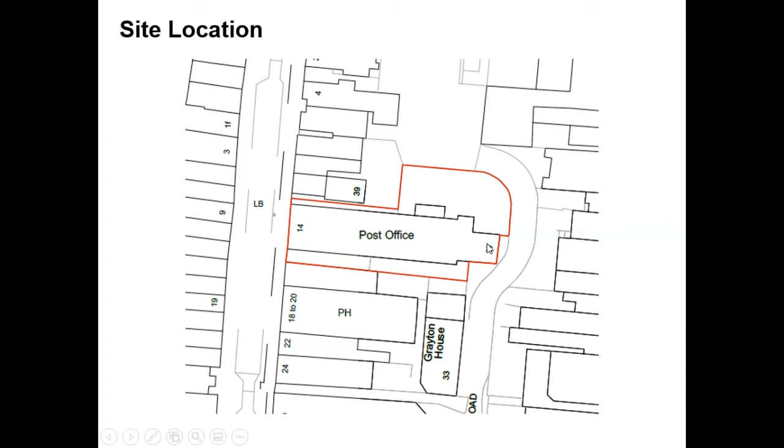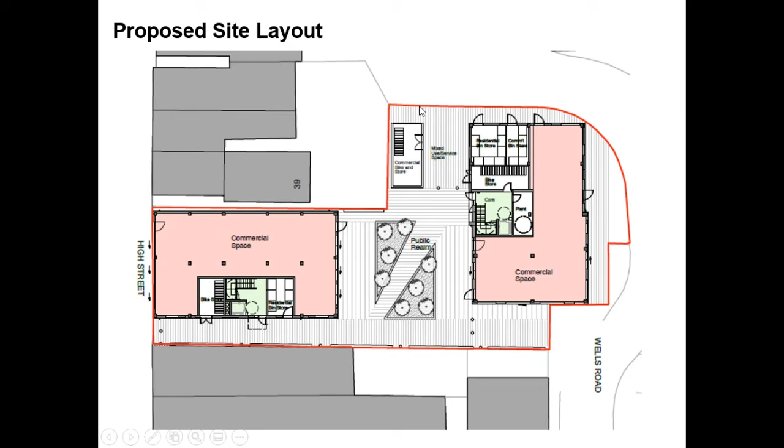In terms of privacy, the council's Quality Places SPD requires a distance of 20 metres between new build flats and 22 metres between new and existing. The new blocks would fall below this standard, with 16.2 metres between them.

There is an amenity issue referenced in the report, relating to the conflict between the windows on the first and second floor level on the northern side of the front building, and those present within the adjacent Flat 12A High Street. A solution has been proposed to address this and prevent a loss of privacy, which I'll cover later in the update section of the presentation.

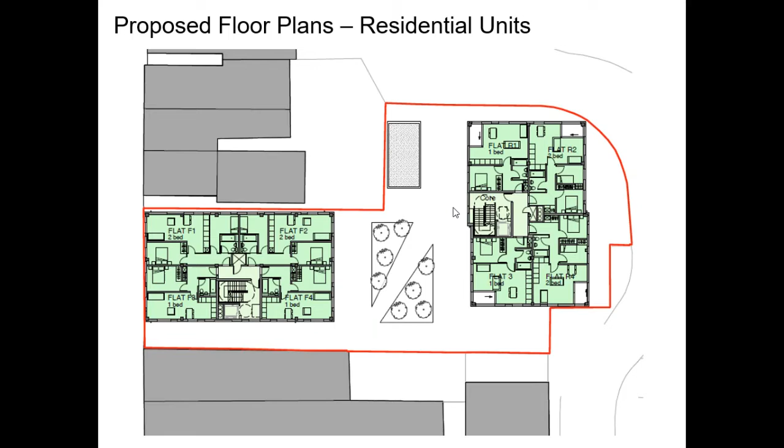It's been designed so the third floor is recessed from the building's main elevations, to visually reduce its perceived height and massing, and thereby respect the predominantly 2 and 3 storey scale of this part of the street.

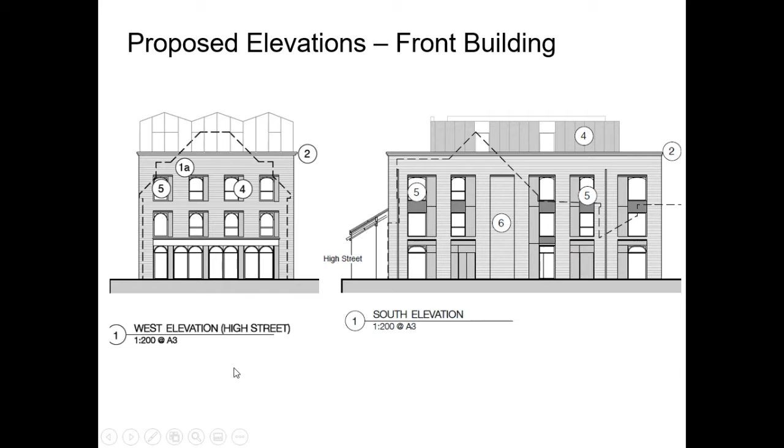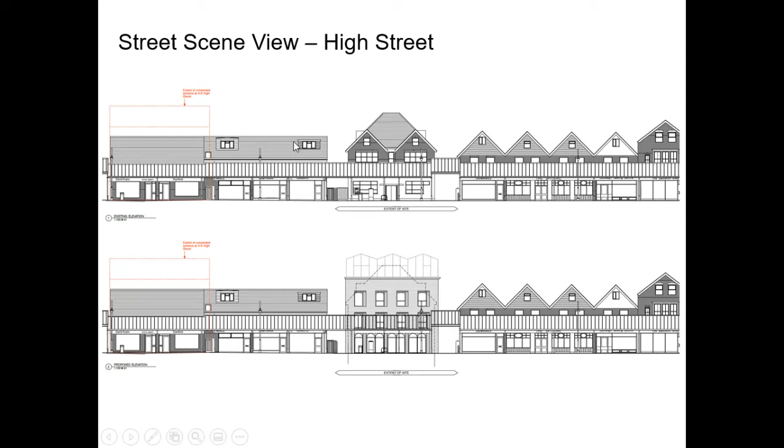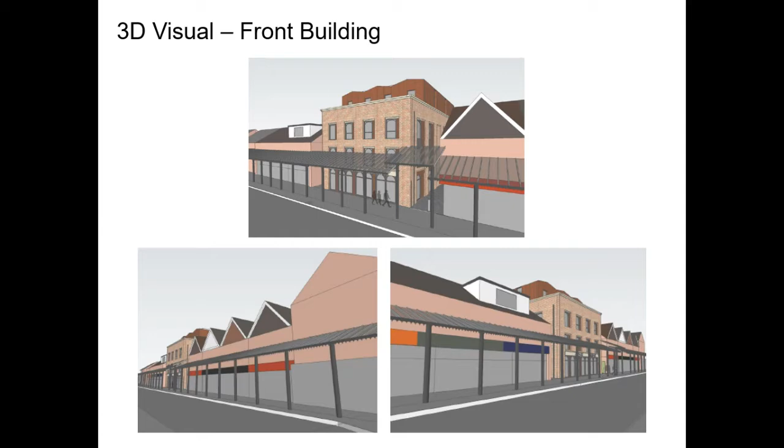Design features including the use of perforated elevational panels to the side of the windows incorporate a franking pattern, included to provide a subtle nod to the former use of the site as a post office. Overall, the simple and robust materials proposed give a high quality appearance to the development, while also providing visual interest to the High Street.

Turning to the rear block, which is the larger of the 2 buildings at 6 storeys in height. This building has less formal elevational symmetry to it, but the overall design remains well ordered and structured to provide continuity with the front block.

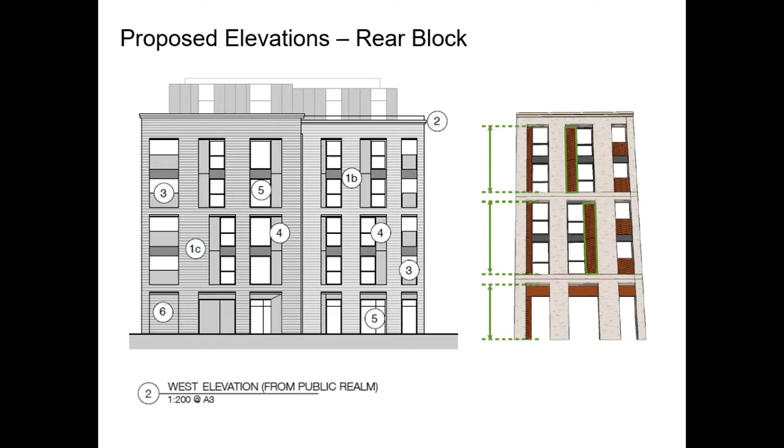Again, a simple palette of materials was used, but this time with buff coloured bricks to reflect the more varied materials on Wells Road, where the development will sit.

Whilst acknowledging that a building of this scale and location will begin to alter the character of this part of the centre of Eastleigh to a degree, it's not considered that it will detract from it, but rather act as a positive driver to encourage further redevelopment and regeneration of this part of the town. The approach to design has been supported by the Council's urban designer, as well as the independent Eastleigh and Winchester Design Review panel.

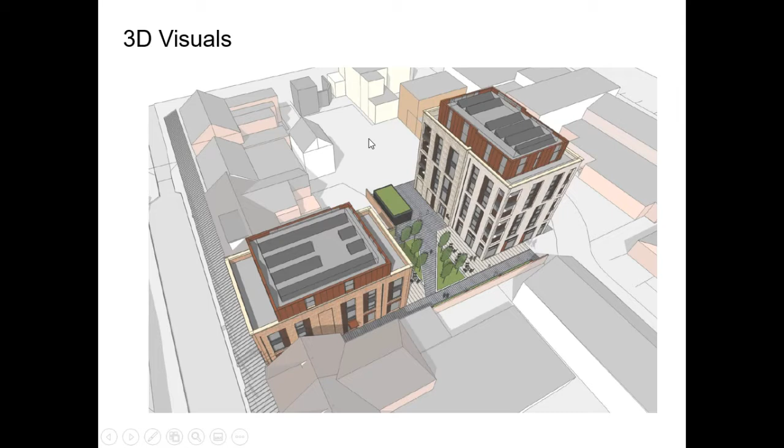As you can see, the space will be well landscaped with varied hard surfacing and soft planting. It also provides potential for outdoor seating for the new commercial uses. As shown in the images, it's well overlooked by the new buildings, which is positive from a community safety perspective, and outdoor lighting will also be provided, which will further assist with this.

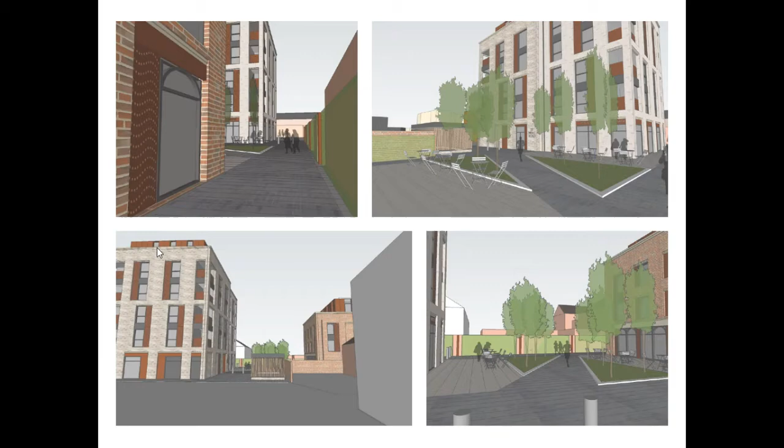The image to the bottom left shows the views towards the site looking southwards, and this, as well as the image in the top right corner of the screen, helps demonstrate the effectiveness of the vertical pairing of the windows mentioned previously, splitting the building into 3 and reducing its perceived massing and scale. They also show the more limited views afforded to the very upper storey of the rear block from street level, with its recessed nature notably assisting in this respect.

Some updates to the reports as set out in the agenda. Some further consultation responses have been received. Southampton Airport have confirmed they have no objection, and have recommended an informative in relation to the use of cranes.

Environmental Health have also raised no objection subject to a range of conditions. These cover contaminated land, hours of deliveries, hours of operation for commercial uses, and noise control measures covering building insulation and music levels within the commercial units, all in the interest of amenity. Members have been sent around today an updated list of these conditions.

Responses have also been received from Economic Development, who advised they're supportive of the principle of redevelopment that contributes to the regeneration of Eastleigh Town Centre, and that it improves public links between High Street and Market Street and the surrounding public realm.

The matter of the reduction in employment floor space, mentioned earlier, was raised, and a developer contribution has been requested to mitigate for this, which the applicant has agreed to. Other matters concerned landscaping provision and the need to ensure new commercial uses can be retained moving forward, which are already covered by conditions set out within the agenda.

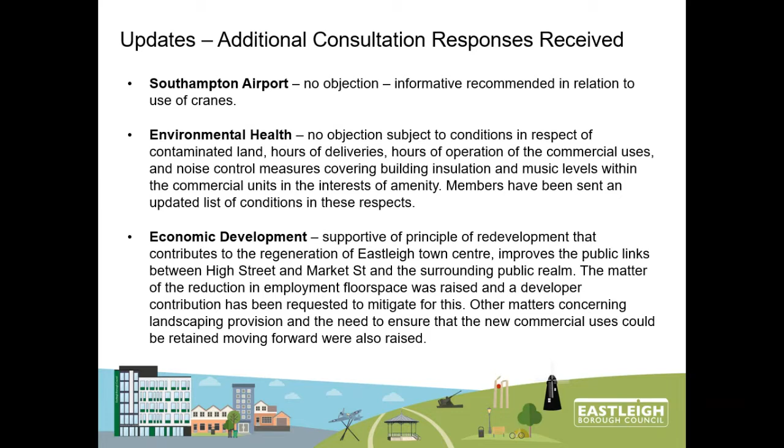Further updates: amended plans have been received. I mentioned in the earlier slides that there was a bit of an issue in terms of the relationship with the windows on the northern side of the building and number 12A High Street, which lies to the north.

To address this, the applicant has reduced the number of windows on this side, so there are now brick panels included, and they're also proposing the use of externally fitted louvres to those windows that remain immediately alongside the neighbouring property. You can see these denoted by the horizontal lines here.

On the right hand side of the screen there's a section drawing which shows how they'll work. They're fitted at an angle to the exterior of the windows, and they prevent views down and into the neighbouring windows and roof lights, which you can see denoted here.

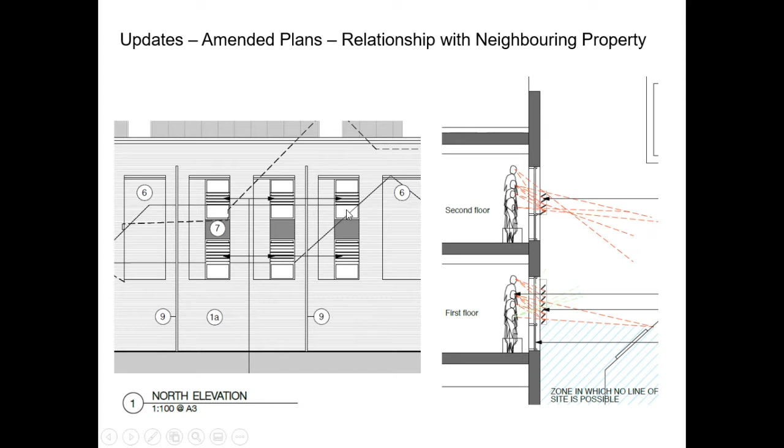Just for clarity, the lower section of these windows will be obscured to prevent views out of it, and conditions are recommended in these respects.

So in summary and conclusion, the development accords with local and national planning policies in terms of making efficient use of a sustainably located and partly vacant brownfield site and achieving appropriate densities, whilst at the same time respecting the character of the area, promoting regeneration and change within Eastleigh Town Centre and contributing to its vitality and viability, as well as securing well-designed and attractive places.

It will also include an over-provision of on-site affordable housing and mitigate its impacts upon, and contribute to improvements to, local infrastructure through developer contributions, which are both social and economic benefits of the scheme. It's also acceptable in terms of other material impacts, including highways and residential amenity, with no objections having been raised by consultees, subject to conditions and/or planning obligations.

The updated recommendation is therefore subject to the completion of outstanding consultations, of which there are a few remaining. These relate principally to drainage matters, and also whether or not any contributions will be required for education and health, and then the addition of any necessary amendments or conditions.

The applicant enters into a legal agreement to secure the required affordable housing and planning obligations, and the completion of a habitats regulations assessment of the development by the local planning authority, and the undertaking of subsequent consultation with Natural England where required, to delegate back to the Head of Housing and Development in conjunction with the Chair and Vice Chair of Eastleigh Local Area Committee to permit. Thank you, Chair.

Thank you, David. So we're now going to go to members of the public who have registered that they want to express an opinion on this item. I believe we have 2 written statements from members of the public who wish to register their objection. Can I ask Guy Riddock, please, to read the statement from Mr. Rod Murchie?

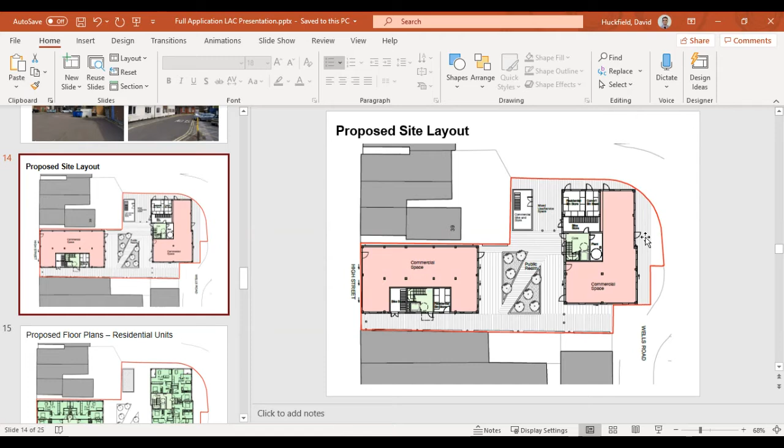In terms of the greenery space, let me go to... let me see if I can find the visual. So in terms of the elevation you were talking about, is it this side of the building in here, or the main pedestrian walkway that would take you from High Street down through past the development to Wells Road?

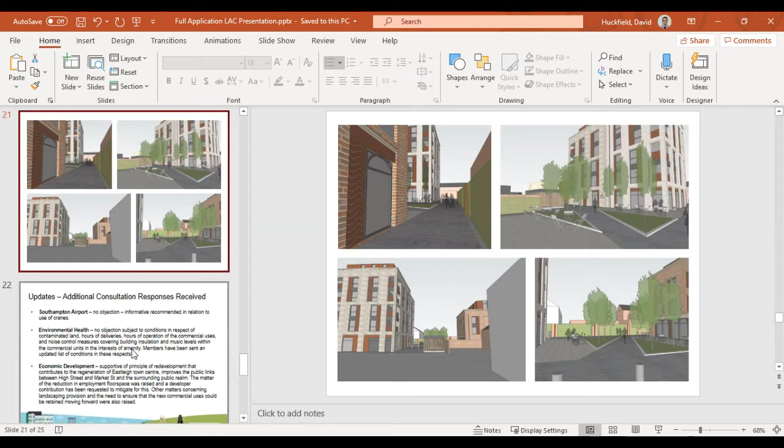So that picture you're pointing at now, the right hand side of that, is to be planted all the way down, is that correct? I will double check. If you can leave that with me, I'll come back to you on that. I'll just double check within the documents and come back to you on it.

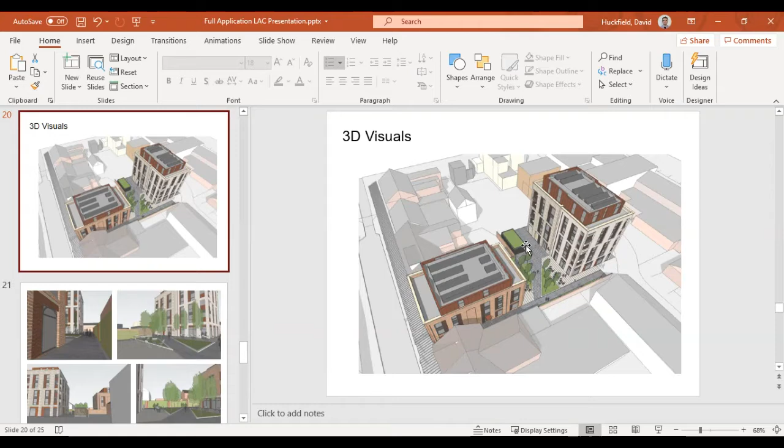Additionally, there is a green roof which is also proposed as part of the mitigation measure, and additional landscaping which will go on the ancillary storage buildings - that's the bike storage and bin storage building in the northern part of the site. So I'll just double check whether that's still proposed. It's indicated by the visual along there, but I'll double check on that point and come back to you if I may. Okay, thank you.

So do we have any other questions from councillors?

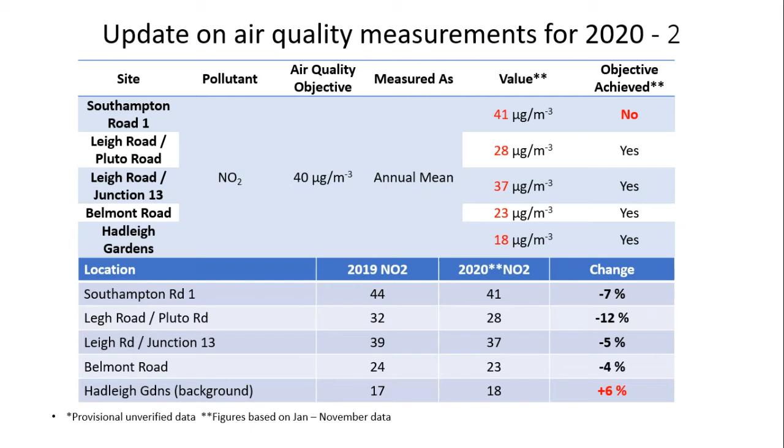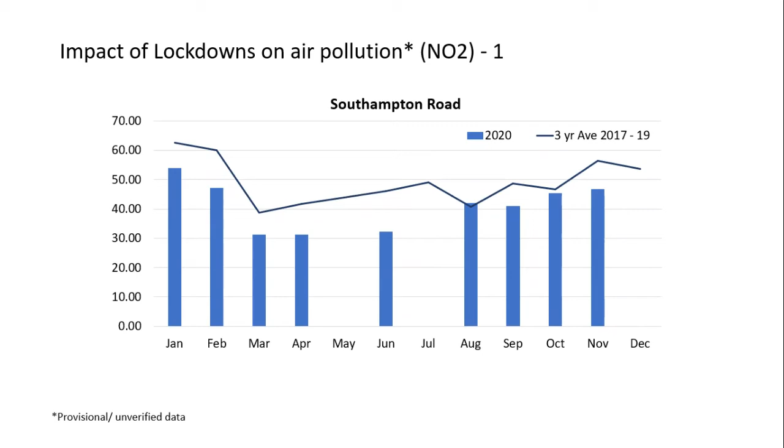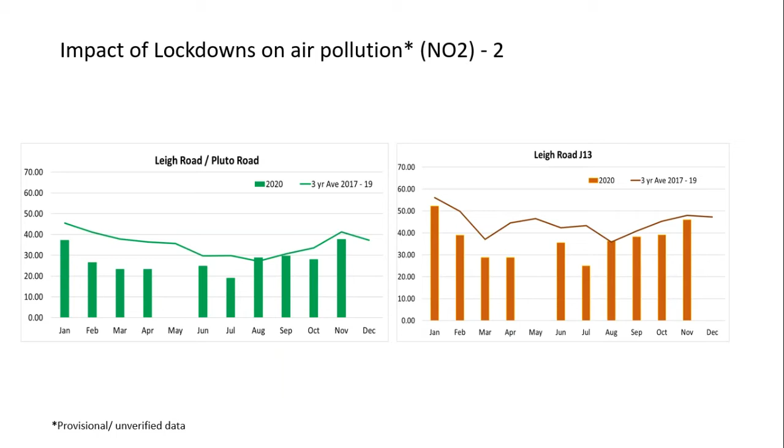So just talking about the DEFRA grant projects we've got. Be aware of the ICNIR low cost sensors. I can't remember what Izzy said at the last meeting, but I know she's been having trouble with reliability with the sensors.

We're now on Mark 3 of the devices, installed in mid to end of November, both in Eastleigh and in Hamble/Bursledon, the other area we're looking at. I had a quick look at the data before the meeting, and we've got improved data collection this time. It looks like they've operated successfully throughout the period, up until I looked at it yesterday.

Partly that might be down to the fact that the new devices allow ICNIR to access the device online and check that it's working all right, and work on it without having to visit site and switch it off and on again, which is what we usually do with these things. So they're able to work at it remotely.

We'd agreed before Izzy left with ICNIR that we'd review the data from these new devices in 3 months, so that's roughly the end of February, and our DEFRA project report is due end of March into April, where we'll be commenting on whether we're going to continue into the next phase if we've got reliability with the devices. At this point it's a little early to say because we don't have a review of the data collected, but it's looking more promising as the collection seems better. They did also improve the Bluetooth and Wi-Fi sensors for the traffic count part of those instruments too.